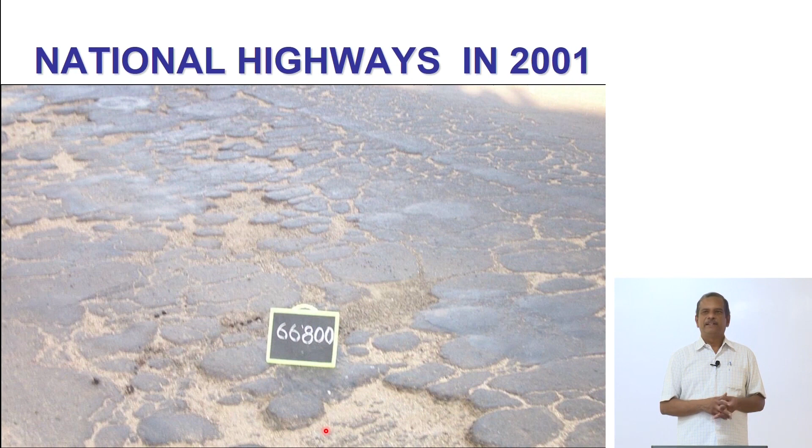If you look back to 2001, this was the condition of the national highways. The condition has improved over a period of time. When we look at the conditions of highways, what we realize from America is that America is rich because it has better quality roads, not that America is rich and hence it has better quality roads. The country's economy depends upon the quality of the roads. If you have good quality roads, that means the country is prosperous.

I think India has now learned from USA. This is a well-known saying from John F. Kennedy, that it is not the wealth that builds the roads, but the roads that build our wealth.

Indian highways today - you said there has not been any significant improvement in the quality of the roads. Let me show some photographs of the roads today. The condition of roads which were very bad earlier has improved today.

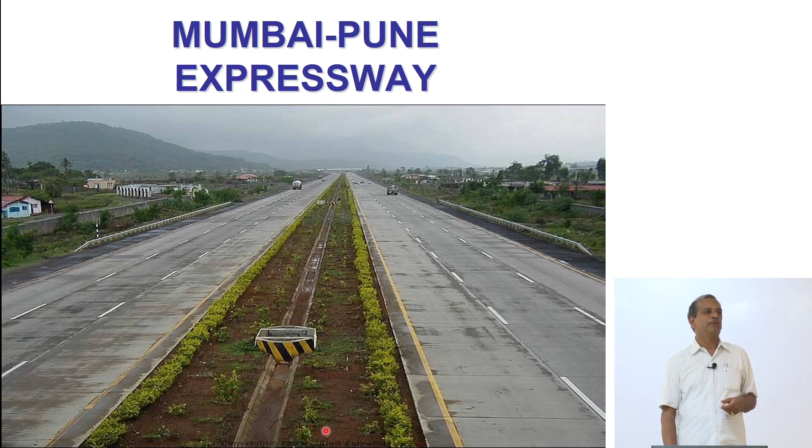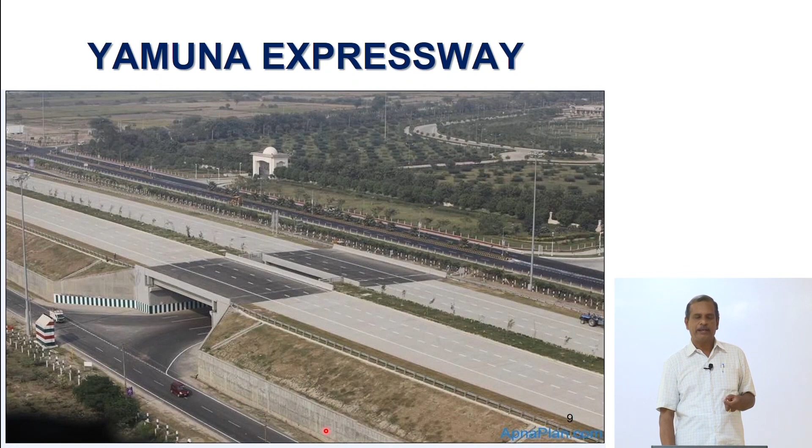This is a classic example of the Mumbai-Pune expressway. We have other highways which are comparable to any other developed country in the world. We are able to see beautiful, scenic roads in the country today. This is a classic example of the Yamuna expressway today.

Having seen this, do you still believe there is no improvement in the quality of the roads? Do you believe there is an improvement in the quality of the roads? There has been improvement in the quality of the roads. But what you do not understand is, what is the cost of constructing these highways?

What are the design factors? What are the issues or challenges which a civil engineering professional will face in the country during the construction, maintenance, and operation of these highways? Let me take you over the issues one by one.

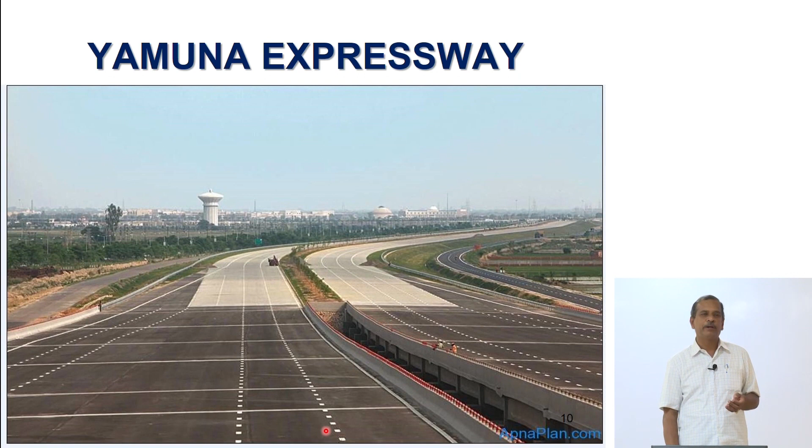If we look at the roads in the country today - this is the Yamuna expressway here - India has got the second largest road network in the world. They carry about 85% of the passenger traffic and about 70% of the freight traffic. National highways are around 1 lakh and odd kilometers.

I will come to the statistics - national highways constitute less than 2% of the country's road network but carry 40% of the traffic. Many of the highways are single lane or 2 lane; only a fraction of them are 4 lane, 6 lane, or 8 lane highways.

Many of them are poorly surfaced, highly congested, and speeds are very low. If you go to any other developed country in the world, you will be able to travel at an average of around 80 to 100 kilometers per hour. But in India, we are able to travel only at a speed of around 30 to 40 kilometers per hour.

The other agony or problem we face in the country today is that India has got nearly 4.2% of the world's vehicles, but contributes nearly 9 to 10% of the fatalities. So the question arises at this point: good quality roads, high speeds, more fatalities; poor quality roads, less speed, less accidents, less fatalities. So what is it that you need - you need safety, or you need faster movement of people and goods?

But as you are aware, Indian traffic is heterogeneous in character. There are nearly 14 to 15 types of vehicles using the same carriageway. The speed differential between vehicles is more, resulting in several road crashes. So the challenge before us is that we cannot copy standards from any other developed country of the world to India. We need our own specifications, geometry design standards. Moreover, our Indian drivers are not as well educated as in other countries of the world.

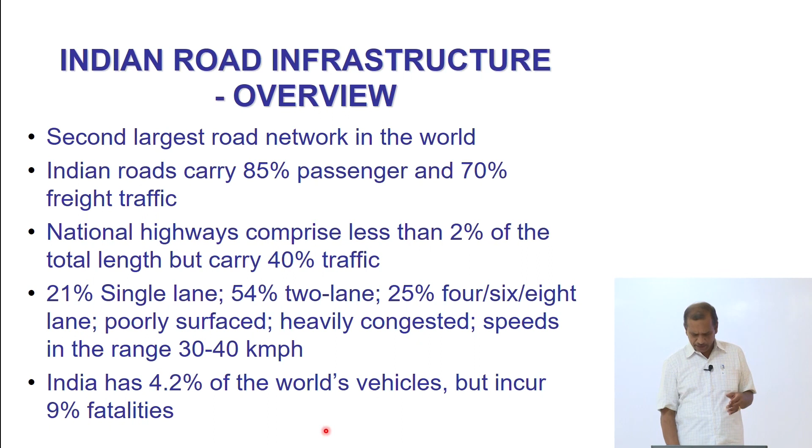The question arises: since the volume of traffic using these highways differs, we have to design these categories of roads differently. Out of the 54.82 lakh kilometers of road in the country, nearly 65% of freight and 80% of passengers are carried on roads, and vehicle growth is of the order of 10 to 10.16%.

So, with vehicles growing at around 10% per year, a single lane road will become a 2 lane road. A 2 lane road will become a 4 lane highway. A 4 lane highway will become 6 lane and 8 lane. There is no stoppage of this growth, which means several highways must be converted from a single lane, around 3.5 meters, to 2 lane at 7 meters, to 4 lane, to 6 lane and 8 lane. This will be the challenge we face in years to come.

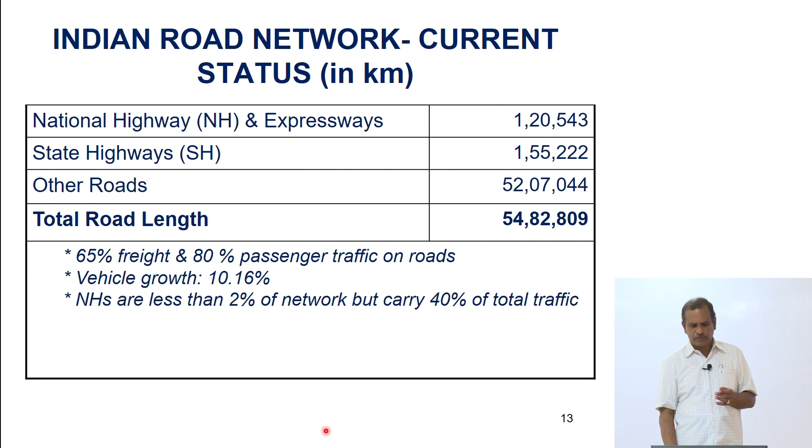When we want to do this, what challenges and problems will we face? Since we learned that the country's economy depends upon roads, we have taken several road building initiatives. The first one, taken up in 2003-2004, was the National Highway Development Program, or NHDP. Under this NHDP, there are about 7 phases to be completed by 2012, but out of this, only a part could be completed; a majority could not be completed because of many challenges and problems. I will come to the issues of challenges, risks, and problems we faced.

The investment in this NHDP, the National Highway Development Program, is of the order of 1.72 trillion, about 172,000 crores. We can put 0 and count the number of zeros. One of the costliest civil engineering infrastructures is a road.

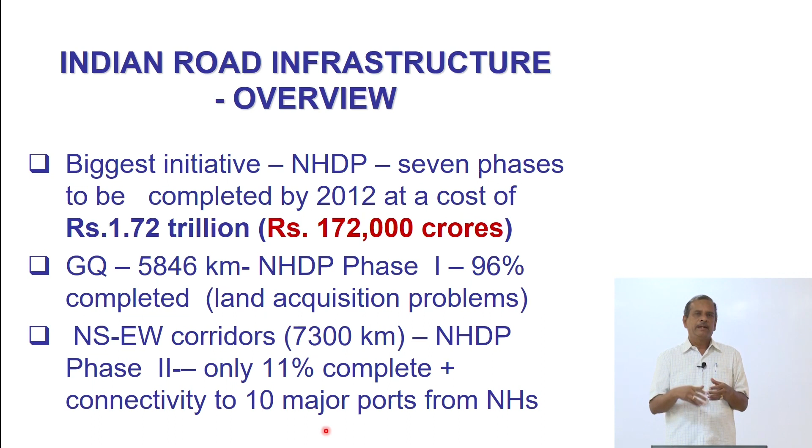This NHDP consists of 2 major components. One is called the Golden Quadrilateral, connecting Delhi, Mumbai, Bangalore, Chennai, Calcutta and back to Delhi. This is around 5,846 kilometers, called NHDP Phase 1. In Phase 2, we have the North-South, East-West corridor, called the NS-EW Corridor, starting from Kashmir to Kanyakumari and from Porbandar to Silchar. This Golden Quadrilateral and NS-EW Corridor connects north-south and east-west, forming Phase 2 of the NHDP program.

All these highways are either 4 lane, 6 lane, or 8 lane depending upon the volume of traffic. As the volume of traffic increases, the carriageway may be widened from 2 lane to 4 lane to 6 lane.

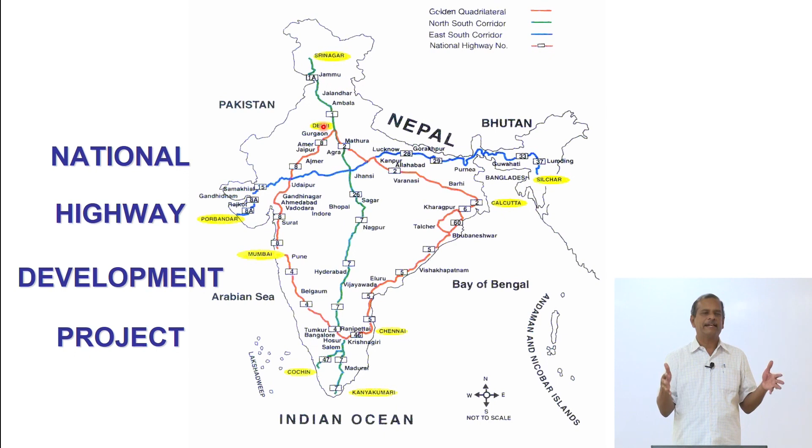This is one of the most ambitious road development programs taken up by any country in the world. We have divided carriageways, service roads where required, grade separators (which we will discuss subsequently), overbridges, underpasses, bypasses around congested cities, wayside amenities, and also enhanced safety features. When different types of vehicles operate at different speeds, ensuring safety for all categories of roads is a real challenge, so we want to build in these safety features in the design.

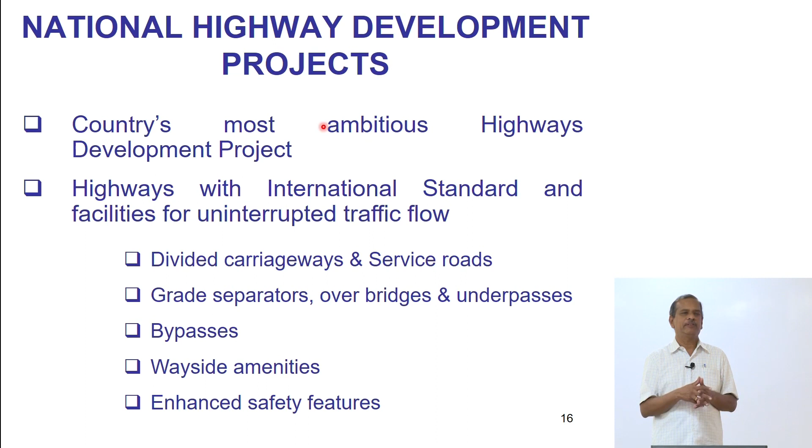We can compare Indian highways with any other country in the world; they are comparable. Under NHDP Phase 3, we have taken up around 12,109 kilometers of national highway, at a cost of around 80,626 crores. NHDP Phase 4 is improvement of 20,000 kilometers of national highways. Phase 5 is widening of the Golden Quadrilateral connecting Delhi, Mumbai, Chennai and Calcutta from 4 lane to 6 lane.

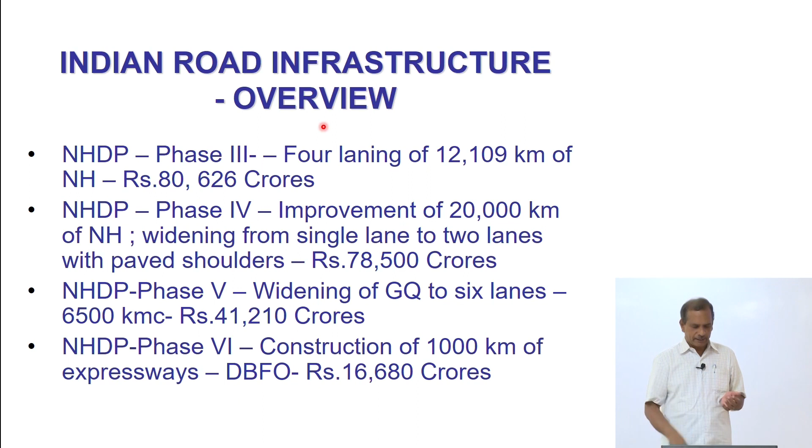Phase 6 is construction of 1000 kilometers of expressways. Under projects 6 and 7, bypasses, ring roads, and flyovers are being constructed around 16,680 crores. The Northeast has got a special privilege of having an accelerated road development program.

The beauty of this is that till about 2001, the design, construction, maintenance and operation of all these highways were taken up by the government of India. Now we realize that the government cannot afford to construct these highways. These projects under the NHDP are taken up under a scheme called BOT - Build, Operate and Transfer.

The concessionaire can bid for the project, design it, build it, operate it. At the end of the concession period, which will be 20, 25, or 30 years, he will transfer the asset back to the government.

The question arises at this point of time, why should you take up the profession of designing, constructing and operating a road? If you have money, you can construct a factory, you can do a business, you can run a medical college. But if you have money, do you think investing in road construction will be a profit making business? Will anyone take up the profession? Toll roads - yes, I am coming exactly to the toll roads.

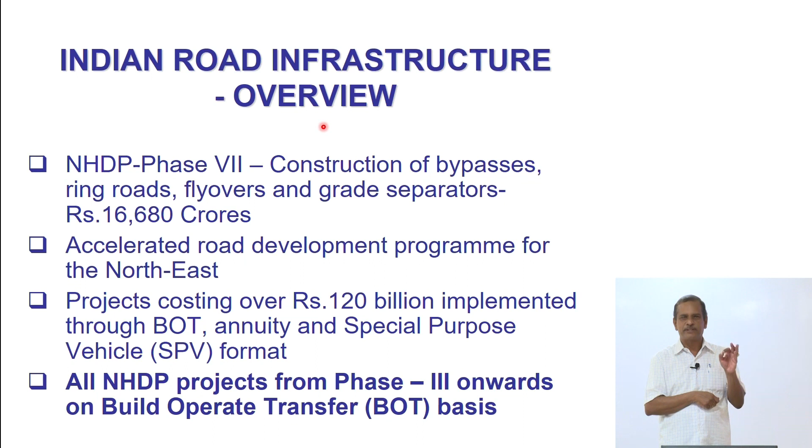By the by, when you try to do this project, will it be a profit making business? How much is the profit one can get? Is a question that will arise in your mind. Let me give an example of how much a roadway will cost.

Example of a road project taken up by L&T IDPL, Infrastructure Development Projects Limited. This road is the Beawar-Pali-Pindwara Tollway Limited. Every highway under build, operate, transfer is given to a road company. The road company has got a board of directors. They collect the toll, they operate, they maintain, and at the end they will transfer.

This highway is around 240 kilometers. The total project cost of this is 2,472 crores for a 4-lane highway of 240 kilometers, which means the cost of constructing 1 kilometer of a 4-lane highway is around 10 crores.

You know that we have 1,25,000 kilometers of highways. Assuming that I want to convert them into 4-lane and 6-lane, you can work out what will be the amount that we require for constructing these highways.

At this point of time, when I have money of 2,472 crores in my pocket, you can put it as a deposit in a bank and get 13% interest. But do you think that investing this money in the road sector will get you a higher return than doing a business or investing in a bank?

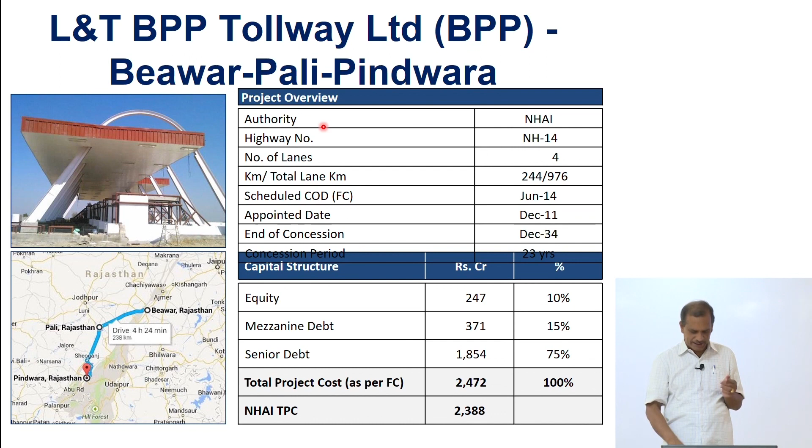Let me take you over the issues and concerns when you want to design and construct these highways. In addition to the NHDP project, the government has realized it's time to construct more kilometers of expressways. We want to construct nearly 15,600 kilometers of expressway network by 2022. We have just started.

This is a huge potential for all of you. You will find more lanes of highways being converted or constructed as new expressways. This project of 15,600 kilometers of expressways will cost nearly 2,50,000 crores. You can divide that by 15,600 to know how much it will cost to construct 1 kilometer of an expressway.

These expressways can be constructed as a greenfield expressway or a brownfield expressway. Greenfield is one where the alignment is new. Brownfield is one where we convert an NHDP into an expressway - a 4-lane existing highway will be converted into an expressway.

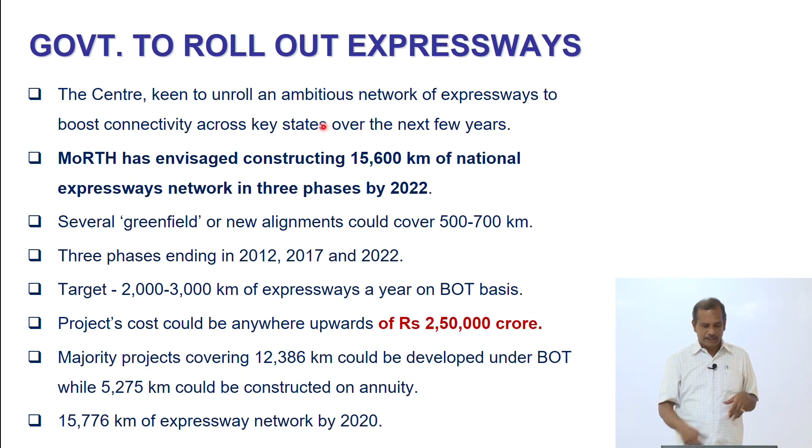The design speed on all these expressways will have a lane width of 3.6 meters. It will be 4-lane or 6-lane expressways, so you will see more and more lanes of expressways in the years to come. Designing these expressways, catering to different vehicles operating at different speeds, is a challenge for you. We will have nearly 16,000 kilometers of expressways in the years to come.

So if I want these highways to be constructed by the concessionaire, what do you need? The government thought over the issues and concerns. What they found is that in this highway construction, 100% foreign direct investment is possible.

Secondly, the government carries out all the preparatory works. The land is given free of charge - you need not buy the land. Your job is only design, construction, operation and maintenance. The government does all the preparatory work for you to design and construct the highway.

The NHDP provides capital grants of 40%, which means if 1000 crores is a project, 400 crores will be given by the government. So your term loan liability will only be 600 crores. You have to work out whether you will get this money back in terms of toll revenue.

In this Beawar-Pali-Pindwara project, which I just made a mention of, the toll revenue is of the order of around 1 crore per day - around 300 plus crores every year. When you get that money out of a 2,400 crores loan, how much can I pay back in terms of principal and interest? How much money do I require for operation and maintenance - this is a challenge before us.

In addition, the government also permits housing, real estate development, and duty free import of equipment and machinery that you require. So the government has framed a structure in which a private concessionaire can take road building as a business, as a profit-making business. As I mentioned, these projects are under the Design, Build, Operate and Transfer - DBOT - projects. These projects have many economic benefits.

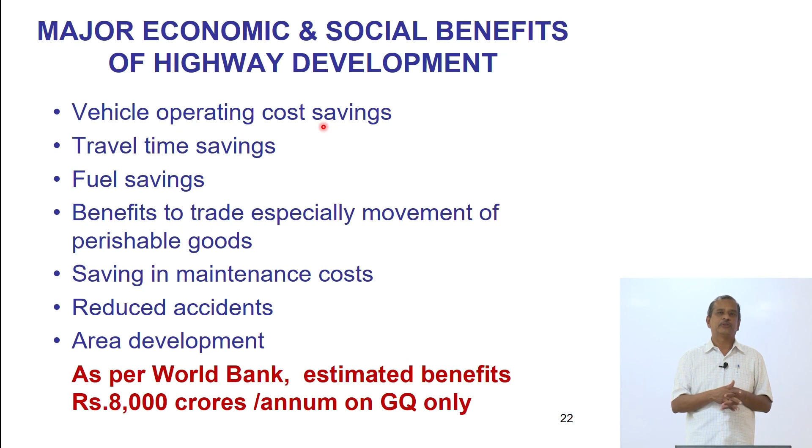The area gets overall developed. So from the golden quadrilateral alone, we found the benefits are around 8,000 crores annually from one golden quadrilateral. Now you can imagine the benefit to society as a whole when we extend this to NHDP as well as other highway projects. So there is significant improvement of societal benefit by constructing these highways.

Other issue is that what I have been saying so far is about a case of a DBOT project, where they design, build, operate and transfer. Where I said the government makes all preparatory works, gives the land free of cost, and you should only collect the toll for 20 years or 30 years. There are projects which will get you higher returns.

With the result, the concessionaires are willing to share their profit with the government. So these projects are called negative grant projects. A classic example is a widening project in Gujarat. It's the Bharuch-Surat section, 65 kilometers. The concessionaire IDAA Infrastructure has said that the project cost is 492 crores. They say that they will pay back to NHAI, National Highway Authority of India, a sum of 504 crores.

So in a nutshell, road building is a profit making business. In many cases, it can be a win-win situation. The government also gets money in terms of negative grant by awarding the work to a concessionaire. It's not only the concessionaire who makes money, the government also makes money. So this money I can use elsewhere. I'll tell you where to use this money elsewhere. So in a nutshell, road construction, road building, operation, and maintenance is a profit making business.

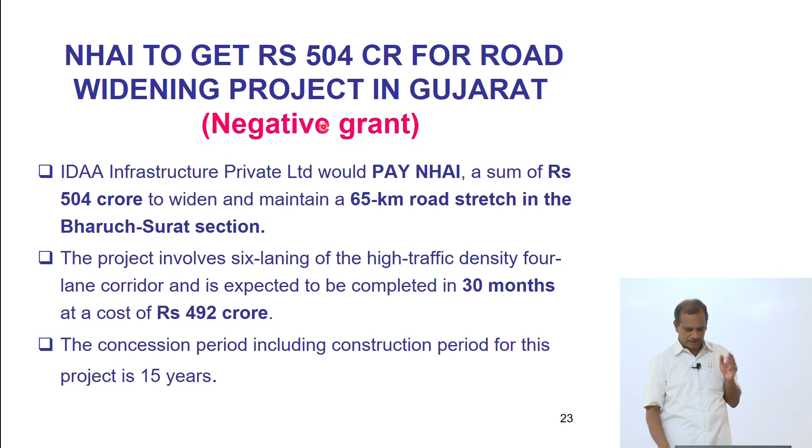When you go further to the projects taken up currently in the country, the major project is the Bharatmala project, wherein we thought about optimal movement of freight and passenger. We want to develop economic corridors, inter-corridors, feeder routes. We want to connect more districts, ports are to be connected, greenfield expressways are to be constructed. This Bharatmala project consists of 24,800 kilometers in phase 1, and the estimated outlay is 5,35,000 crores for the next 5 years. This is where your challenge lies.

When you graduate from here, you can be a concessionaire, a contractor, or a businessman taking up Bharatmala projects. So the issue is how the resources should be optimally utilized. The major challenge we face in the country today is how to optimally utilize the resources available: number 1, money; number 2, materials; number 3, manpower. How do you do that? I think at the end of the 4-year program that you study here, you should be able to design, construct, operate and maintain the highway facilities.

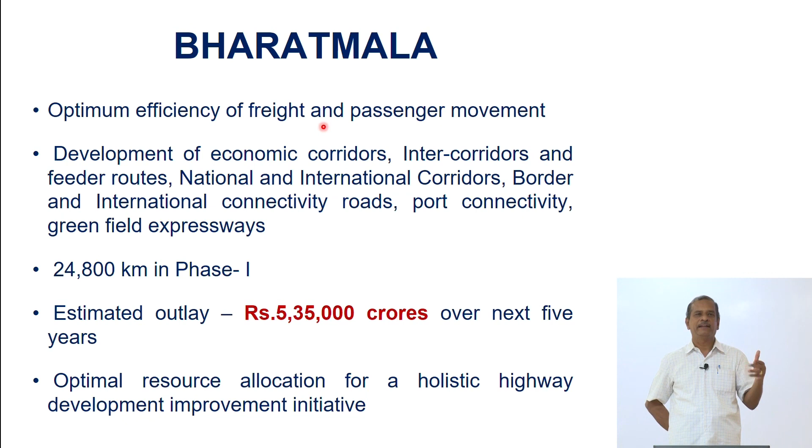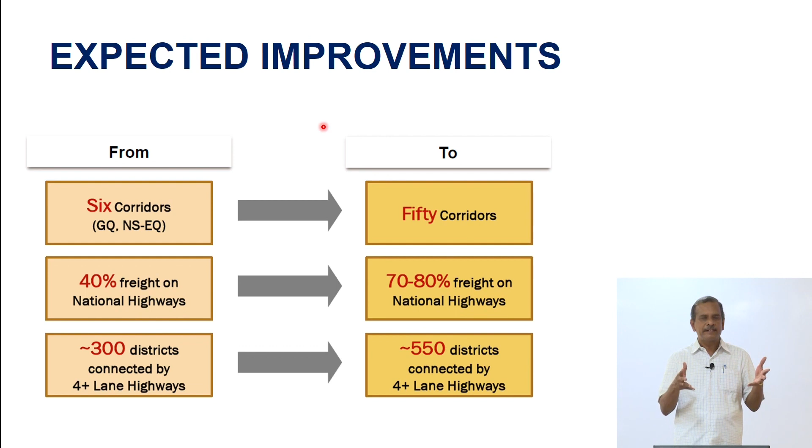When you look at these Bharatmala projects, earlier in the NHDP, we had only 6 corridors of the golden quadrilateral: north, south, east, west corridors. This will go from 6 corridors to 50 corridors by the end of the Bharatmala program. Only 40% of freight was carried by the national highways; this is expected to go from 70 to 80%. Thirdly, only 300 districts are covered by the NHDP projects. Now, more than 550 districts will be covered under the Bharatmala program. With the result, the quality of the roads will improve, and more districts will have expressways and highways connected through better quality roads.

The outlay, as can be seen, is for economic corridor development. We will have inter-corridors and feeder routes connecting to this Bharatmala program, a National Corridor Efficiency Program, border roads, international connectivity roads, port connectivity, and expressways. So all this will be taken up around 83,677 kilometers at a cost of nearly 7 lakh crores. So one of the huge investments in civil engineering infrastructure is on designing and constructing these highways and expressways. That is what you should understand at the outset.

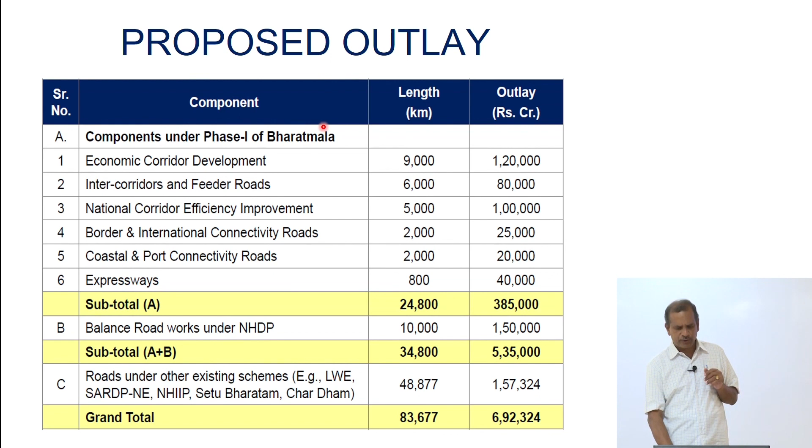Leaving aside these expressways, when we come next, we talk about state highways. So we need a system of hierarchy of roads.

We have the village roads, we have the district roads, we have the state highways, we have national highways, we have expressways. So, there is a hierarchy of roads in the country today.

Nearly 5,000 kilometers of state highways need upgradation from 4 lane to 6 lane, or even 2 lane to 4 lane. These have got a significant impact, but many of the projects on the state highways are taken up by funding from international funding agencies like World Bank, Asian Development Bank.

Many of the international agencies are coming forward to fund these NHDP projects. So, we have also taken up private sector participation for construction and improvement of these state highways, from single lane to 2 lane, 2 lane to 4 lane, depending upon the demand.

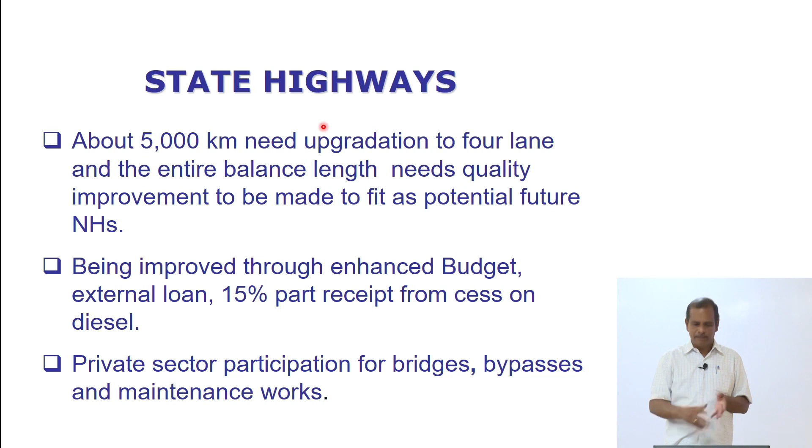Other than that, urban infrastructure. One is expressways, we talk about national highways, state highways, now come to the urban roads. We had a program called the Jawaharlal Nehru National Urban Renewal Mission, an investment of the order of 1,20,000 crores, wherein we wanted to connect and improve 35 cities with a population of over 1 million.

We need sustainable development. We need the linkage between asset creation and asset management. The issue you should remember is that creating an asset is not a major issue; maintaining and preserving this asset is the major challenge. You need money, you need resources. I will come to the issue of how these resources can be managed.

In addition, we also have a smart cities project. You can go to smartcities.gov.in, where you will get more details about the smart cities we have identified, and the improvements we are going to take, so that we will have world class cities in the country in the years to come.

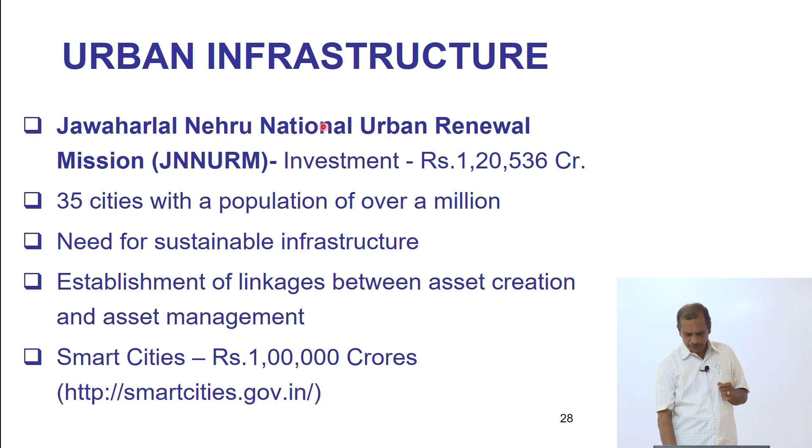So, huge investment is being made for construction of urban expressways or improvement of movement of people in urban areas. We found that only 30% of the 100 crore population lived in urban areas, but now more than 40% of the 140 crore population by 2025 will live in urban areas.

That will bring severe pressure on the urban roads, with the result more congestion, more delay, more accidents, and you will be invited to construct more and more flyovers, underpasses, interchanges, bypasses, new roads, and circular roads.

A classic example of how vehicular growth has impeded the movement of people and goods can be seen in Bangalore. You were able to travel maybe around 30 to 40 kilometers per hour, maybe 10 years back. Today, the average speed of travel is not more than 10 kilometers per hour.

If you want to travel 15 kilometers, you require 1.5 hours. So, you have vehicles, you have roads, but you are not able to move. So, what is the solution that you can think of? This is a challenge before us. Urban road and urban infrastructure improvement is a third major challenge we will face, apart from expressways, NHDP, state highways and urban roads.

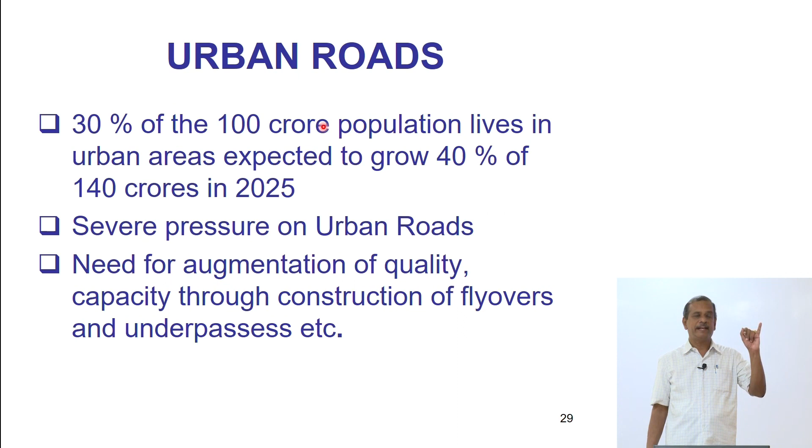The fourth issue before you is constructing other roads, outer ring roads. To give an example of how much we have spent for the outer ring road for Chennai, the outer ring road is around 30 kilometers.

You can go around Chennai using the outer ring road, you can try this outer ring road from Vandalur to Nemilicherry. The investment for this 30 kilometers is around 1,000 crores, which means the cost of constructing each kilometer of this outer ring road is more than 30 crores.

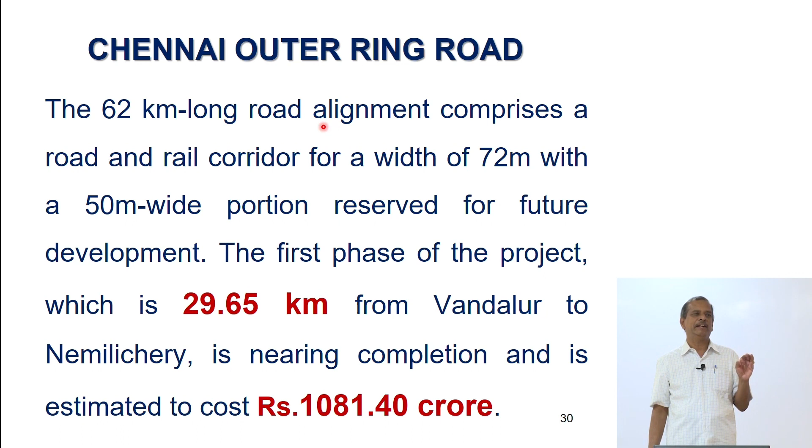If you want to construct this outer ring road, you need money, but more importantly, we require materials. The challenge before you as a civil engineer is non-availability of the materials for construction. I will come to that issue now.

Apart from NHDP projects, expressways, state highways, and urban roads, as I mentioned in the beginning, nearly 52 lakh kilometers of road in the country are rural roads. About 20 years back, we started this rural road program called the Pradhan Mantri Gram Sadak Yojana, PMGSY. Under this PMGSY program, we wanted to connect and provide an all-weather road to all villages with a population of 1000.

All-weather means motorable all through the year. So, initially we wanted to connect all villages with a population of 1000 with an all-weather road.

We connected all villages. Then we took up the next phase to connect all villages with a population of 500, and we have completed that in the country today. We have moved forward, and now we are in the process of connecting all villages with a population of 250 with an all-weather road.

A separate fund has been created for this rural road program. You should remember there are two components of tax payment to the government. One is the conventional tax, which you pay when you buy every liter of petrol or diesel, but that tax money can be used for any purpose by the government, such as defense, education, or healthcare. You may pay a road tax, but it can be used for any other component. Whereas if you pay money in terms of cess, that money has to be utilized only for the purpose for which it is collected.

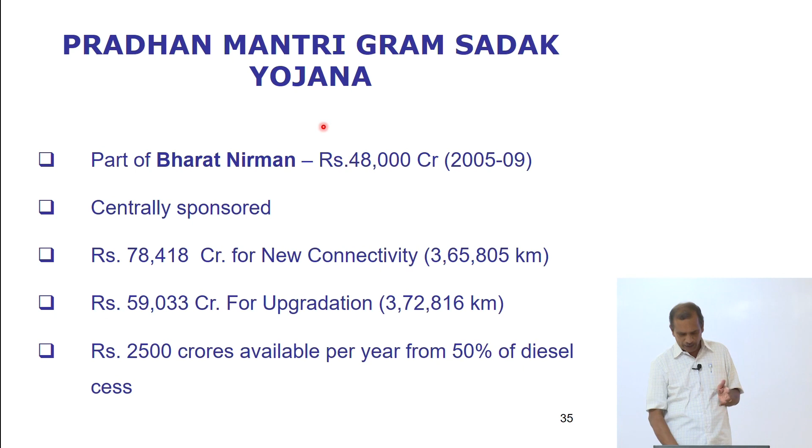Out of 5,89,317 villages, unconnected habitations number around 3,30,000. So the country's economy can grow if and only if the rural roads are also improved.

On one hand, I talked about savings in travel time and vehicle operating cost. But we should also see the benefits of providing better quality roads to the villages. By providing better quality roads, the education level of villagers improves, health improves, and they are able to sell their products at a much better price. So the economy of the villages also grows. In a nutshell, more societal benefits come from improving village road quality, and more economic benefits come from improving highway quality.

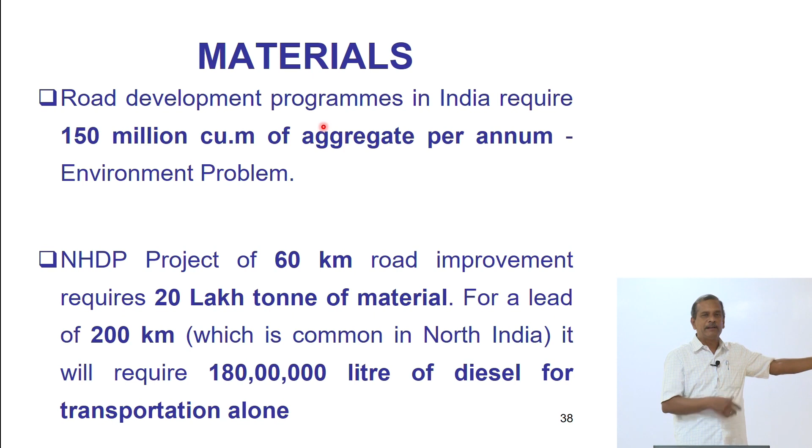Remember, I am now talking about road construction. Always remember, this infrastructure that we have created should last longer. It will require materials subsequently for doing the operation. Road will undergo deterioration, you will find cracks, you will find potholes. So, I need to provide an additional thickness of this pavement in terms of bituminous layers. If that is the case, where do I get materials? So the major first challenge faced by all of you when you graduate is that when materials are not available, how am I going to construct these highways? That is the first and major challenge before you.

So in all, for a pavement whose strength is around 5% strength of subgrade, I require nearly 77 centimeters of pavement thickness, if the expected traffic is around 150 million standard axles. We express the number of commercial vehicles in terms of standard axles.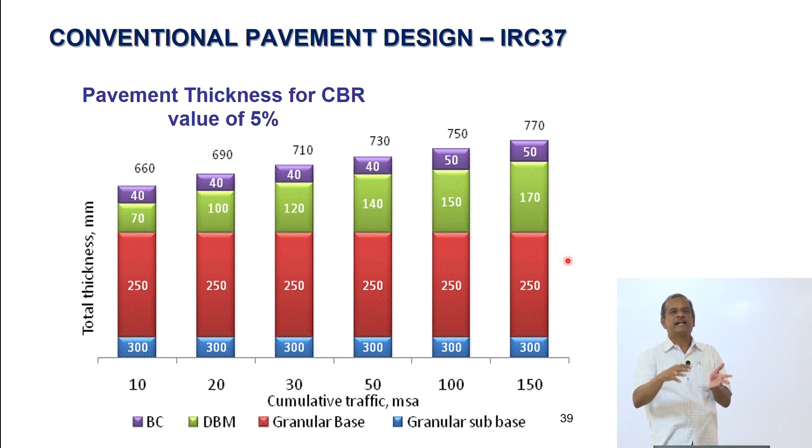A truck is supposed to carry 12 tons. If a truck carries 12 tons, the front axle is supposed to carry 4 tons, the rear axle will carry nearly 8 tons. This I call a standard truck. When the vehicle carries higher and higher loads, the damage that they cause to a pavement increases exponentially.

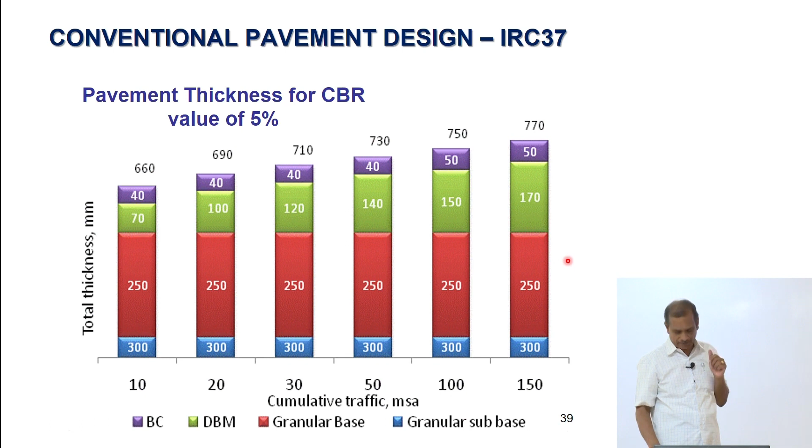Suppose if I put in a number, the number of vehicles likely to use in a period of 15 or 20 years is 150 million, I require about 770 millimeters thickness of the pavement layers. In this, if you want to construct, I require nearly 15,000 metric tons of aggregates for constructing 1 kilometer of a 2-lane highway. So typically a 60 kilometer stretch will require about 20 to 30 lakh tons of aggregates.

For constructing the outer ring road, which I had mentioned for Chennai, we have considered more than a lakh cubic meter of soil. We have a huge quantity of material that we consume. Where do we get this material? How to design, construct different layers? What you are seeing at the top is only the black top, but what is buried below is different layers, different materials. When materials are not available, how to make the structure long lasting and sustainable is a challenge.

As the road undergoes deterioration, your vehicle operating cost will also go up. So the next challenge is how to ensure that the road you are designing and constructing lasts longer, gives good riding comfort, and you are able to travel smoothly, comfortably and safely. It is not only designing and constructing that is a challenge, operation and maintenance is also a challenge before you. How to construct a forgiving highway, how to build in safety features, how to ensure that the average speed is more than 100 kilometers per hour.

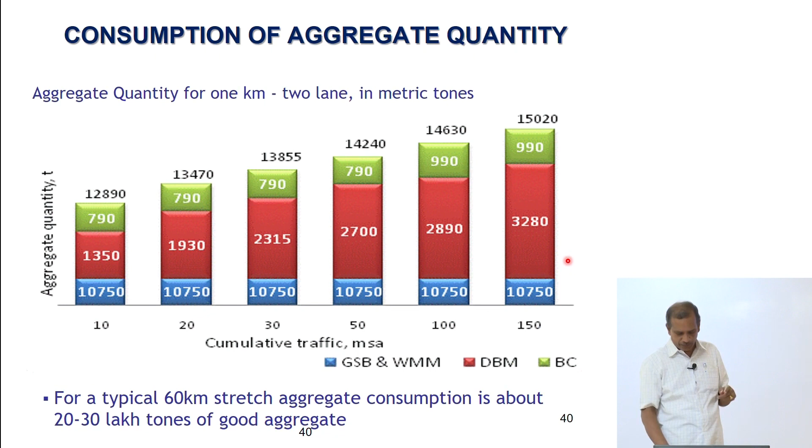So when should I convert a 2-lane road into a 4-lane? When you convert a 2-lane into 4-lane, you require more quantity of materials which are not available. If so, what is the challenge and how do we design this? The challenge before you is the selection of the pavement type.

The black top that you are seeing is called a bituminous surface. We use bitumen for road construction. Some Americans call this asphalt, British call it bitumen, both are one and the same. They are obtained by the fractional distillation of petroleum.

We use this for road construction, but this bitumen, which is a waste product of the refinery, is being sold at a cost of 30 to 40,000 rupees per metric ton. We require several thousand metric tons of bitumen.

So in a pavement, the bituminous layer alone will cost nearly 40% of the total pavement cost. The issue arises at this point of time: we have to import crude, we have to get material for construction. So is a bituminous road the only option available to me for construction? If we look at this...

The second question you should understand is, if I construct a road, how many years will it last? Will it last 30 years, 20 years, 15 years, 10 years? When it fails early, it needs more early maintenance. So you need to look at the design of the road so it lasts longer. If you are a concessionaire, you would like to construct the road and forget about it. For 30 years, you should not need any maintenance. So that is the case.

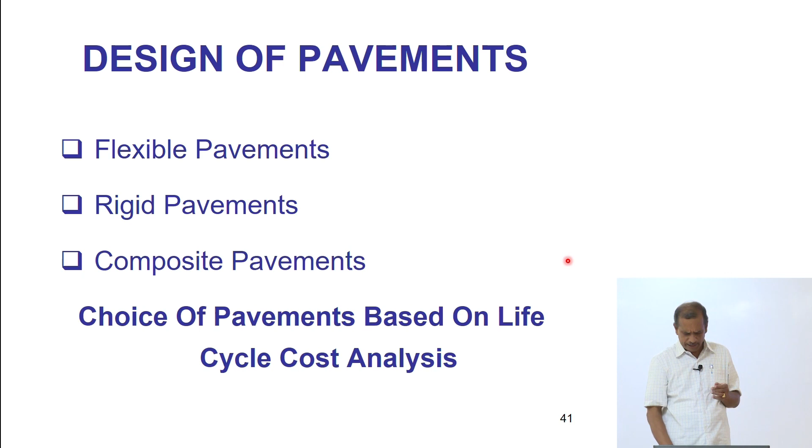You can design the road like a flexible pavement or a bituminous pavement. In a bituminous pavement, I have the embankment, a subgrade, a subbase, a base course, and a bituminous layer. The black top seen at the top is the bituminous layer, whose thickness is maybe around 150 to 200 millimeters, but costs nearly 40% of the total cost. I need a granular layer as base course, a granular layer as subbase, and about 500 millimeters of subgrade. Huge quantities of material are required if you want to construct a bituminous road.

Better quality materials give wider distribution of stresses. With weak materials, the load distribution will be sharper, higher stresses will come at the bottom of the subgrade, which means the subgrade will be affected, and you will find an undulating surface on top. So if you want the stresses to remain within allowable limits, either you should increase the thickness or use better quality materials. So one option before you is to choose a pavement which can be a bituminous pavement. The other option is that I can also go in for a concrete pavement.

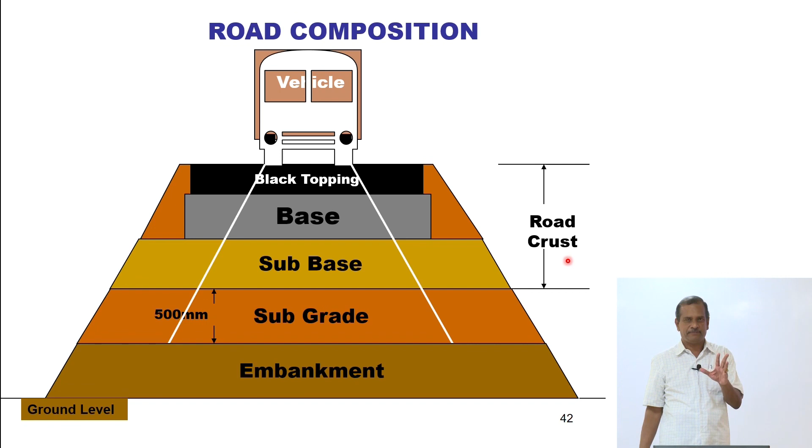The issue is that when I construct a bituminous or flexible pavement like this, its life is around 15 to 20 years. It cannot last more than that. Alternatively, if you go in for a concrete pavement, it lasts nearly 30 years without major maintenance. Secondly, the thickness of the concrete pavement is much lower compared to a bituminous pavement.

But the cost of constructing a concrete pavement will be slightly higher than a bituminous pavement. The cost difference varies depending on the day. When bitumen is around 30,000 rupees per metric ton, the cost of concrete pavement will be higher than bituminous pavement by around 20 to 30% more. The issue is: should I spend more initially and spend less on maintenance, or spend less initially and spend more on maintenance subsequently? That is a challenge that we will face, that you will face.

No one will tell you, when you design a road, to design a bituminous road or a concrete pavement. It is the job of the civil engineer to decide the appropriate pavement type which will last for 30 years without major maintenance. So when material is not available, how are we going to design the structure is a challenge before us.